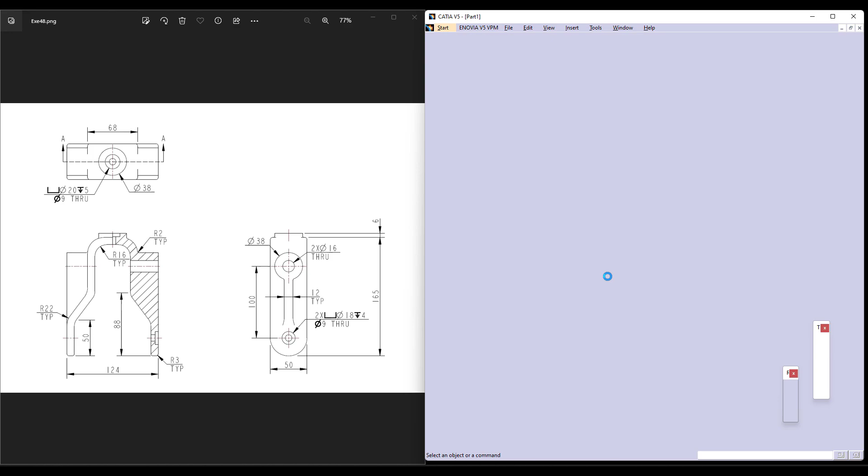Let us begin by making this model using our part module. Under your mechanical design, you have part design. Instead of taking the whole shape and giving a 10 offset, I'll just take the outer shape and add thickness to it. We can do that using our pad command.

Once I enter the pad command and say sketch, let us try to make the outline of the sketch first. This is the first line, which is around 50. Trying to make this line, and then we'll join the angle and give it as 88.

Let me try to mirror this onto the opposite side. Now I want the angle to end on this location and then the profile to go straight and close it over here. The whole thing can be mirrored onto the right side.

Since we already know that from the base to the end of this is supposed to be 88, I can either give the distance from here to there as 88, or I'll use this as well as this to give it as 88.

Now we know this, which is the overall length, which is 68. So I can either give end to end or give the measurement of the line, whichever is flexible for you. Now we know the overall distances, so let's try to maintain those as well.

From end to end, this is supposed to be 124, and the overall height of the body is 165. So from this to the end of the body is supposed to be 165.

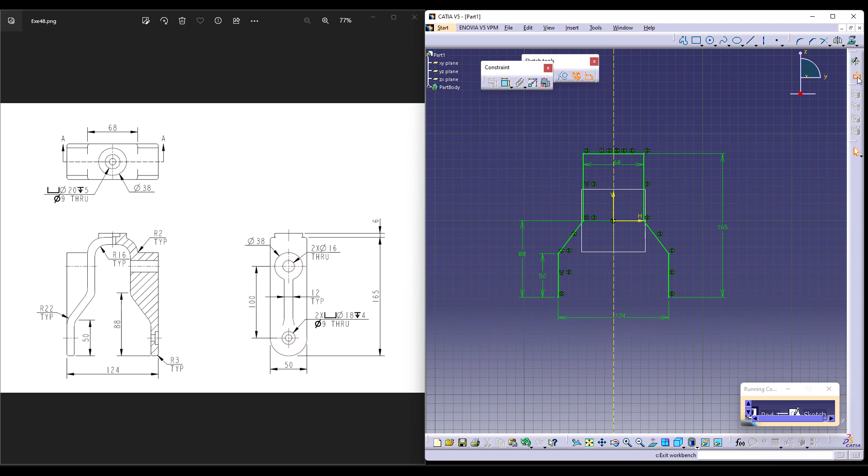Now while adding the material, I know that the thickness of this is 10, so I'd like to add it till 10. Once I exit and say OK, it will automatically ask you, do you want to use the thicken option? Once you say yes, it adds to your thickness side. Under your mode, you have thickness.

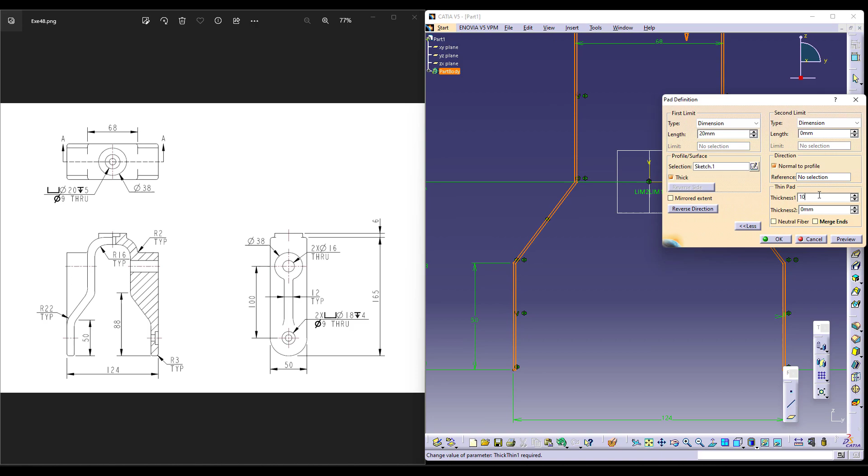Now go back to the front view. The one we have done is on your outer to outer dimension. So the thickness should be towards the inner side and should be around 10, because the dimensions are outer to outer. This is your first model.

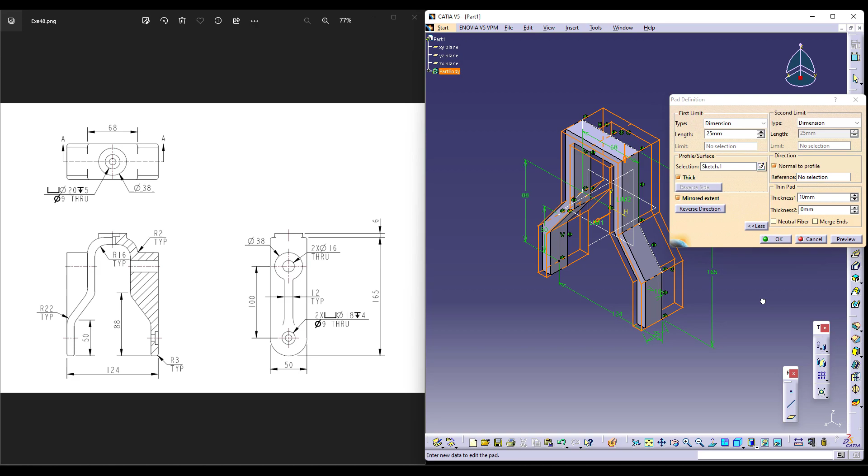Now, while adding, I haven't decided how much to. It is supposed to be added up to 50. I'm using mirrored extent and giving 25, because wherever in CATIA you use mirrored extent, you give half the dimension as it doubles the value.

Now, before proceeding further, I'd like to give rounds. The reason is all the additions of material are onto the round. I cannot give round later and add this feature, because the round should be reflected to the existing feature, same as well as on the top.

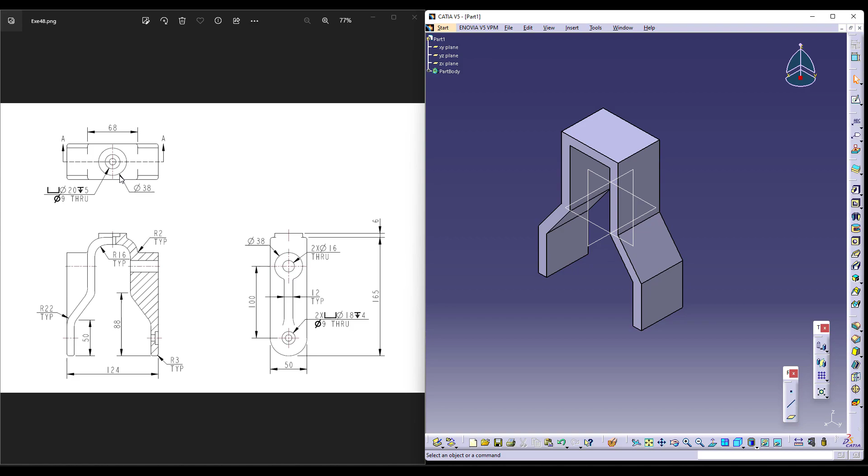So let's try to give the fillets. Firstly, the outer ones, which are all R22. Let me try to give the R22. R22 typical is given to the outer side. So I'm just trying to take R22 typical to the outer side.

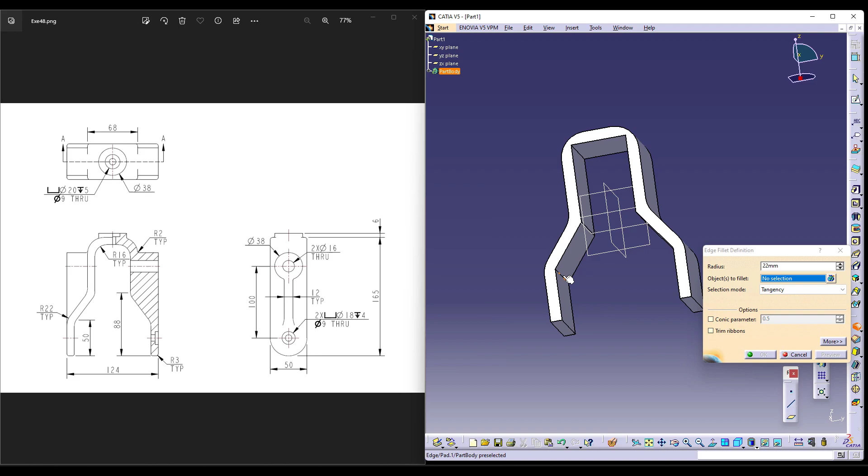Now, there are rounds given on the inner side, which is R16. Let's try to do that as well. Let us take the inner side of the model. Rotate it a little bit onto the other side for your better understanding, and give this as 16. This is the rounded structure.

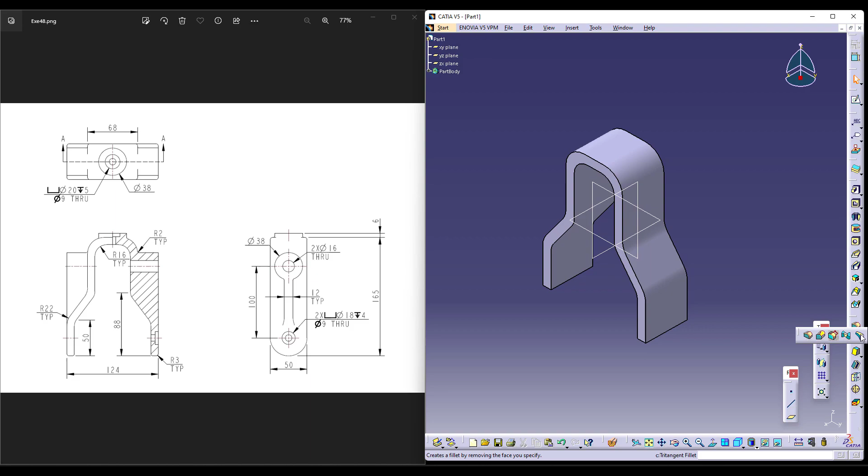To this one, there are a few additions of material which are this way. There is a circle which is added up to this. So let's try to first give a full round, because the distance for this circle is given with respect to the center of the full rounded profile. Full round is tritangent fillet, wherein it tries to give a tritangent fillet onto the edge. As you can see, tritangent is maintaining tangency with three different faces.

I am selecting two different faces and the third face to create the tritangent fillet. Now, let me try to add material on this face. As you can see, they are in line, that is, the circle is also in line with this.

So I am trying to make it that way, and I'll take the right view for better understanding and then try to sketch the circle. Now we know that the circle diameter is actually 38, and the distance from center to center, as in this center to this center, is supposed to be 100. So instead, let us try to give the center, let us try to take concentricity first.

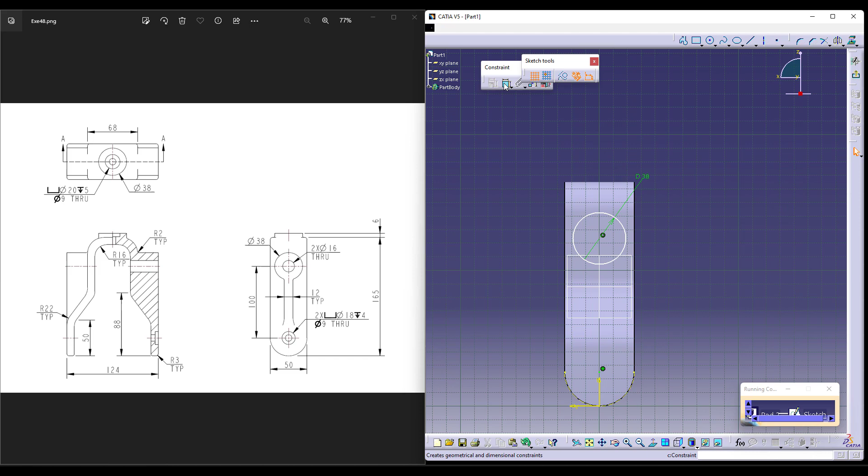This is my concentricity, you can check if it is concentric or not. I already have the icon, so I don't need to give the concentricity again. Now the distance between this center to this is 100, so let's try to give that as 100.

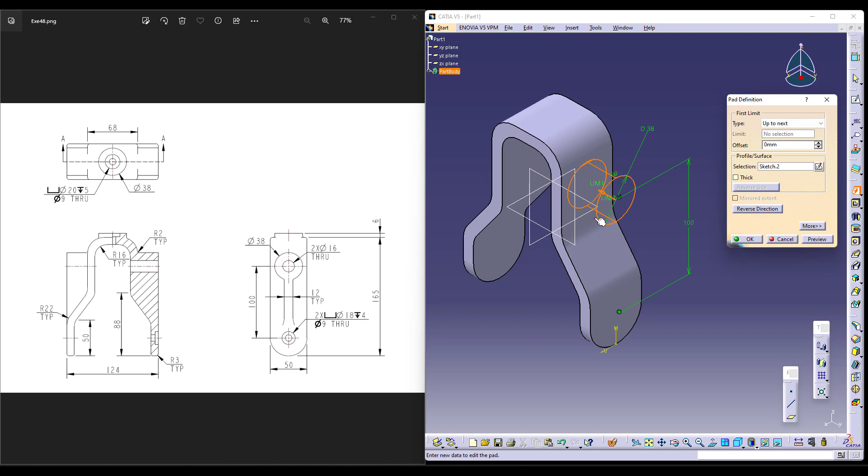Till where is this circle added to? The circle is added up to the immediate next surface it can find. Since the rounds are already given, it will automatically try to add material with respect to the round, as you can see.

Now I can mirror it onto the other side with respect to the center and go ahead with the modeling. There is also another circle of 38 which is added on the top, over here. So again I can select the same. Since it's located exactly at the center, I don't need to do much.

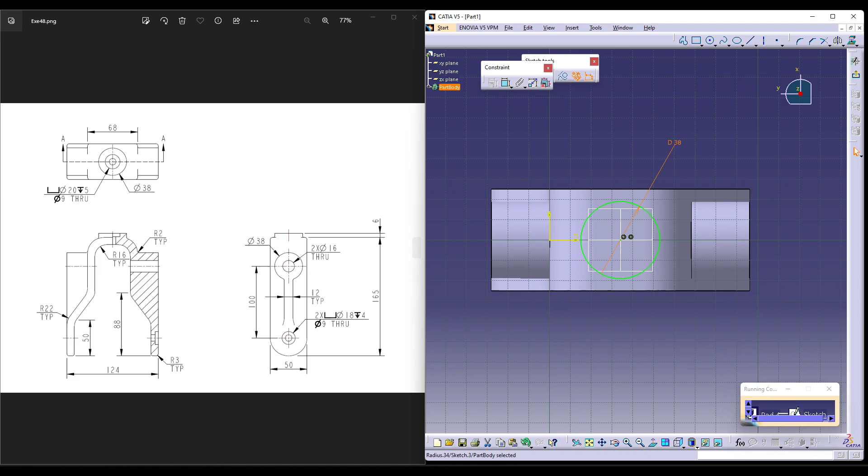I already have the center. All I have to do is just give the circle and maintain the dimensions. While doing so, I have to coincide this exactly at the center, then maintain the dimension, which is supposed to be 38 — again shown in the top view as 38. The addition of material for this is done up to 6, so I'm just going to give 6.

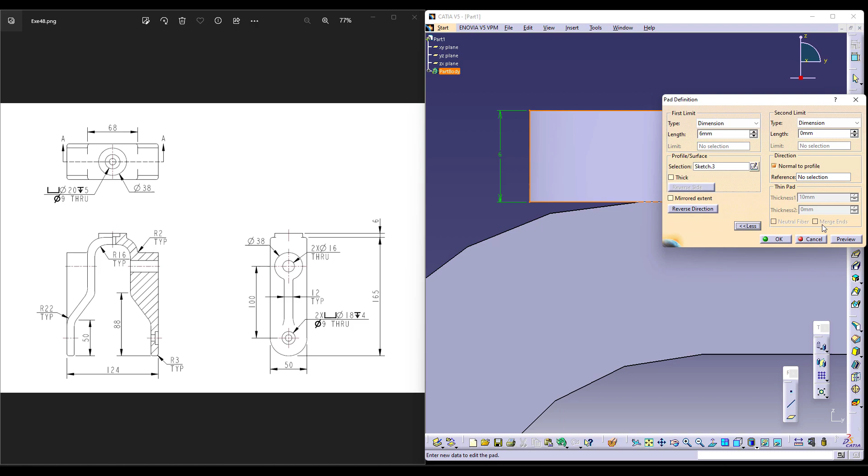Now, when I say preview and go back to the front view, there will be some part of it which is in the air and not connected to the body, which I do not want. As per the drawing, it is supposed to be connected to the body and the round should be given. So on this, under the second limit, I will say up to next, so it does not create issues and adds it up to the next body.

This is the addition of material. Now, there are ribs you can do using your stiffener command. So I am trying to make the stiffener command on the front plane, considering this as well as this as my reference.

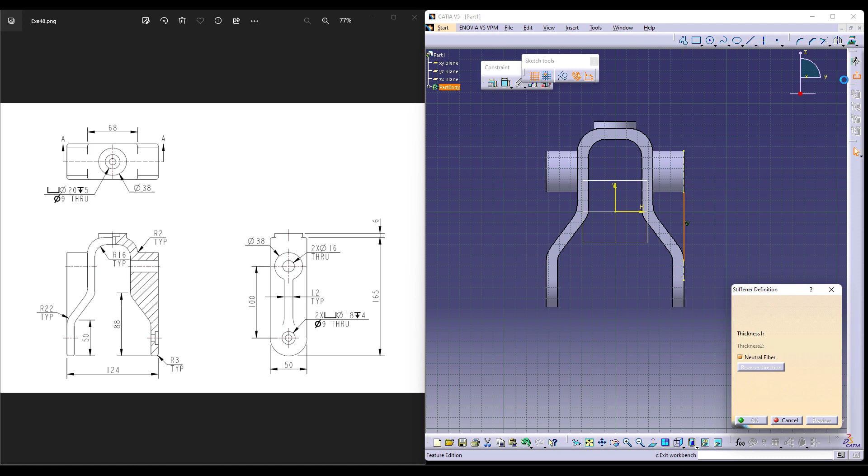It's a very simple straight line, so you can directly take a straight line from here to there and then say exit. The thickness of the rib or stiffener is 12, I'm just taking it as 12. Now the same thing can be mirrored onto the other side because it has a common reference, so you can do it onto the other side.

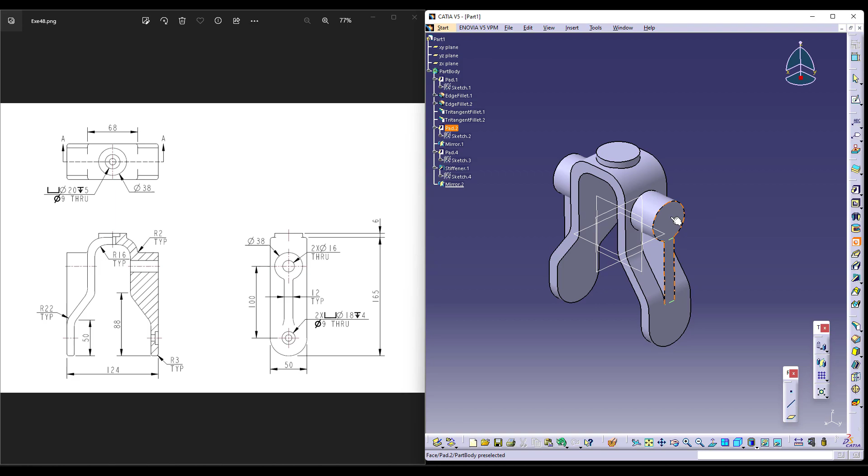Now let us try to drill holes before we give a perfect finishing operation to this model. First is a very simple hole located at this location. Again let me try to maintain concentricity. In every video of mine, you see concentricity maintained, and the reasoning is also provided in every video of mine.

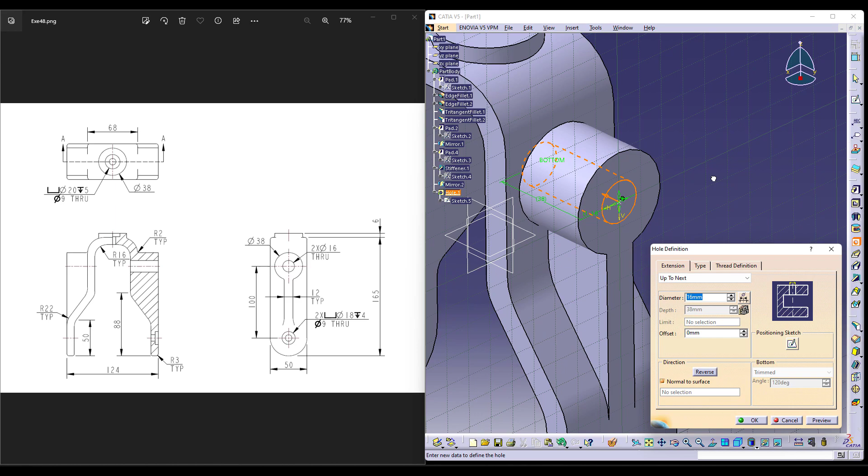The reason is that if you try to update the model, the hole also should auto update itself. That is called feature based modeling. If you don't do it as per that, the whole model will fail if you try to make any changes later on. We know it's 16 diameter and through, so I've given 16 diameter and I'm mirroring that onto the other side as well.

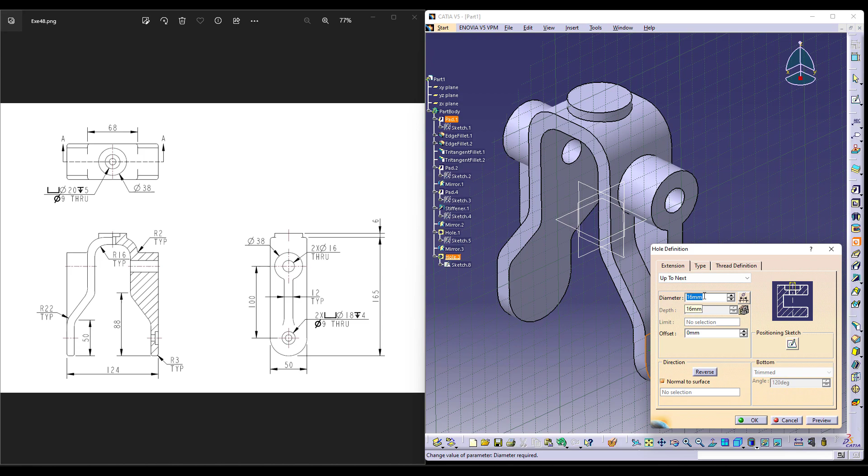Now there are counter bore holes located over here. So again, to go to your counter bore under type, we could select counter bore. This is your counter bore dimension — actually 18 with 4. The axial hole dimension, which is the inner hole, is actually 9 and is through.

Now let us try to position that. Again, as usual, we have to maintain concentricity. Say exit — we can see the hole which is already being drilled, you can see the feature. This is your counter bore hole. You can mirror it onto the other side and also see the counter bore.

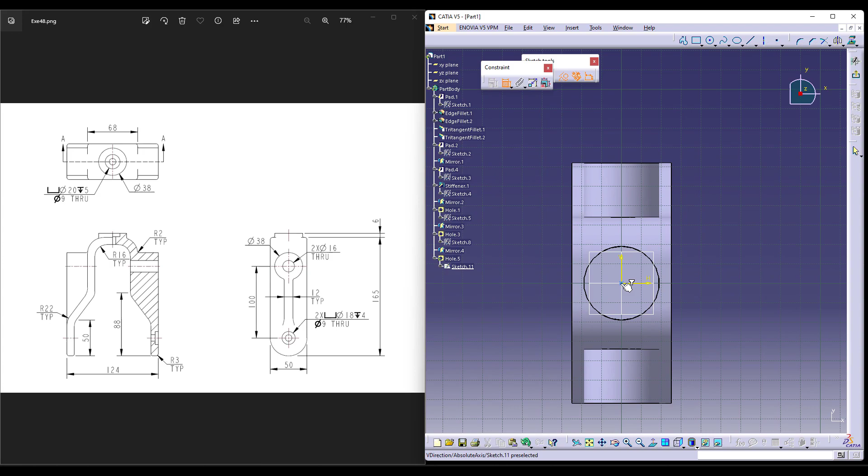The same type of hole is drilled on the top as well. Again, let us try to maintain concentricity first and then give the dimensions as per the drawing we have. Now it is 20 and 5 depth, so under my type counter bore, this is supposed to be 20 with 5 depth.

The actual inner hole is 9 and is up to next, through. Once I say OK, it drills the hole.

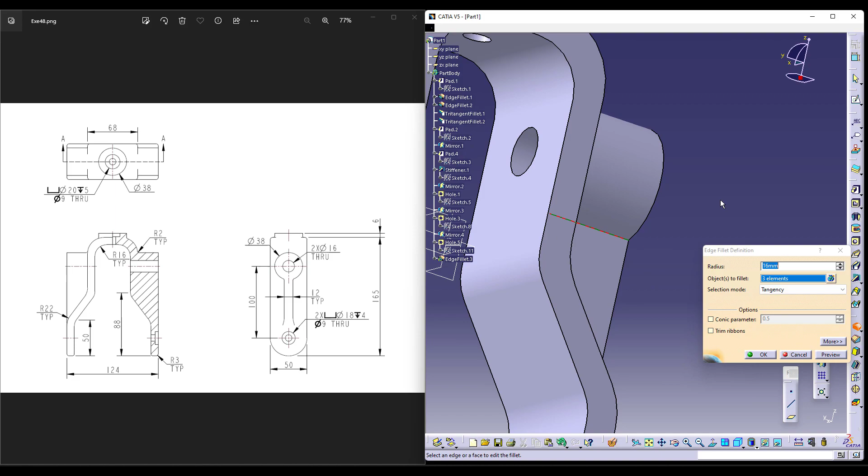Now the last option are your rounds. You can give rounds as you like, but let us start — I want the round to have a very smooth flow. So I'm giving it to the sharp edges over here first, giving it only as 2 because they have already mentioned it is supposed to be 2.

Now let us try to give the flow completely onto the body. Again, I'm using a fillet. This is complete flow through the body, as you can see, it flows through the body without any issues. This is how you maintain flow for the rounds.

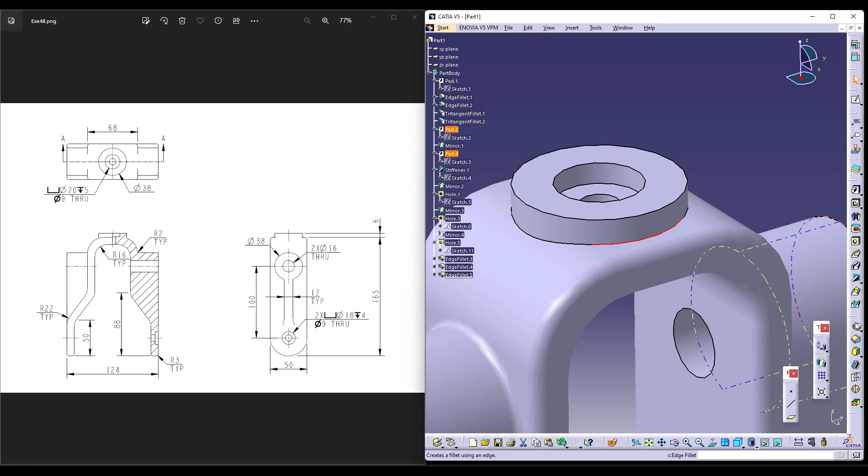Similarly, since I have taken rounds at this corner, when I give it to this edge, it flows through the complete body, and that's actually 2 mm. The same can be done on this side as well — just select the edge, it flows through the complete body and gives you the rounds. The last round is on this location; I'll just directly select it and give it, and it will show you the round.

This is a very simple beginner level of part modeling exercise at our institute. You can also follow the same process and practice step by step. If you want to know a little more advanced level in any module you're looking for, you can contact us.